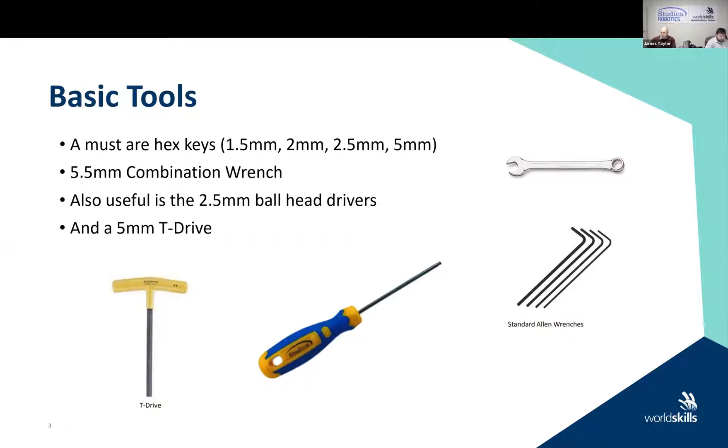There's a 2.5 millimeter ball head driver. So we have a picture of that there. That's kind of handy. And you may want a larger 5 millimeter T drive or maybe some T drives. And when we switch back, we can talk about that. So when I start to put together some frames and so on, I'll show you some of these tools that you would think about having in your collection.

Okay. Some of the other things that you may want, and I'll show you these, is needle nose pliers. These are kind of handy and they're easy. Everybody can get needle nose pliers just to reach into certain locations. If you are going to adjust the wiring on your robot, you may wish to have a power pole crimper and some power poles. Okay, so those tools are easily available. We have them for you. You can get them online or add them to your kit.

You may wish to change some of your cables, so you can do custom PWM crimping. So we keep a PWM crimp tool here just in case we want to make longer or shorter cables. And I may use, I may not use, I've got a little picture of a sample vise there that clamps onto the edge of a table.

As James said earlier, if you're going to an event and you're allowed one toolbox, that can take up space. So that's something that you have to think about, whether you want to bring it to an event. But locally or handy around, you can have those, and there's just a sample one. I use a little one that's got a slide on it that clamps to the side of the table that I'm working on.

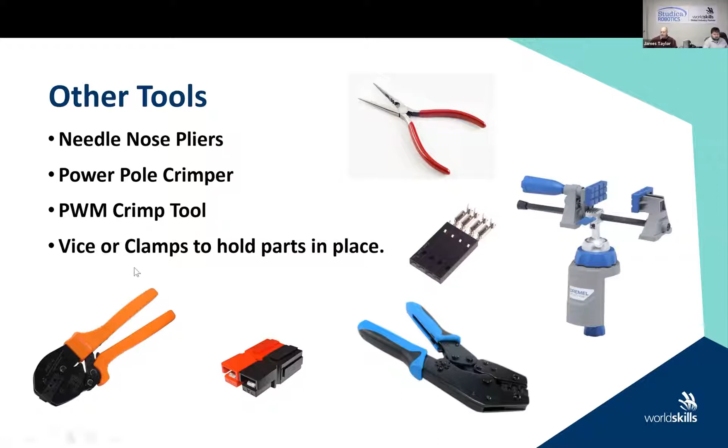Remember that when you do go to an event itself, there are some tools provided, yes, and you'll have a list of those, and there would be vises and so on. But sometimes when you're trying to assemble certain mechanisms and you've only got 2 hands, it's kind of handy to have that extra hand going forward.

All right. So today we're going to look at a chassis. Some people would call it the base. Some people will call that the drive system. And one thing that you must remember about your chassis is that it's generally more important than anything else in the robot. If that base chassis isn't successful, then your robot is not going to drive. So this is where we start. We start with this. We go through the design iterations.

Okay, what type of chassis do we want? What type of weight does the chassis have to support? What drive system are we using? We may have obstacles to go over. We may have height restrictions and drive restrictions. And you also have to think, when you are designing your chassis, exactly what your programming skills are.

So we cannot provide to you all of the resources. So with a lot of these different chassis, there's a little bit of extra math and a little bit of extra theory when you're going to put them together. Your chassis needs, of course, to meet your strategy goals. So when you get a challenge to start with, the first thing you want to do is sit down with that challenge and do a strategic analysis.

I usually tell people when we're doing this to start, look at all the tasks that you need to complete and begin to do two things well, and work towards doing those two things well. Once you do those two things well, then after that, you can begin to redevelop and work onto it. But a lot of times it can be difficult if you try to do too much at once.

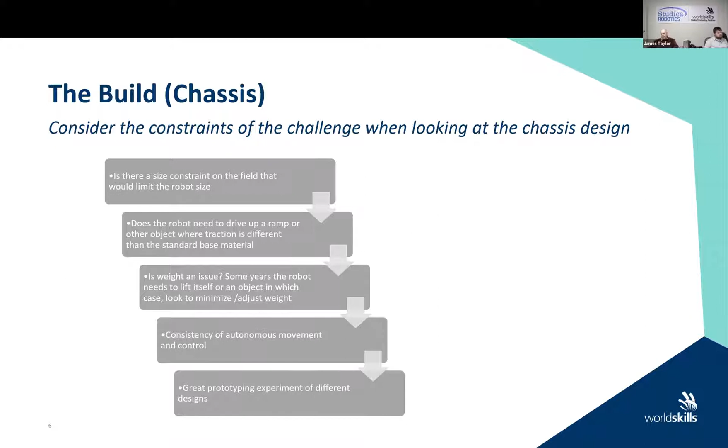And please remember that great prototyping is what you need to do. You should experiment with all sorts of different designs. On the floor behind us right now, there's 3 or 4 different designs. We've built all sorts of different kinds, and we've just prototyped them, and then we sit and we say, okay, these are the performance characteristics of what we built here. It's best suited for this challenge. These are the performance characteristics of XX or YY. And this is what we do going forward through that challenge.

Okay. So the drive base. Our drive base that we are going to build is going to be a Kiwi drive, or a 3-wheel holonomic drive. It'll have 3 omnidirectional wheels and DC motors. So we're going to use 3 DC motors on it to drive the wheels. Why did we choose it? Simply because it is an interesting chassis to build, so that we can take a look at some of the programming algorithms when you are going to do this type of chassis.

For those of you that haven't built one, it is not the easiest chassis to build and program. There are a lot of issues. There's math involved. There's weight distribution involved. There's lack of traction involved when you only have 3 wheels versus 4 wheels, and so on. But we thought we would build this chassis in this training because we've built some other chassis in different trainings.

They're becoming a little bit sought after. We see a lot of personal service robots right now out there that have 3 wheels, so that you can do that. It gives you a little bit of greater maneuverability. But remember, as I said, it comes at the expense of some complex algorithms required to program it. A robot like this, which has 3 motorized wheels, can have fairly independent tangential, normal, and angular velocities.

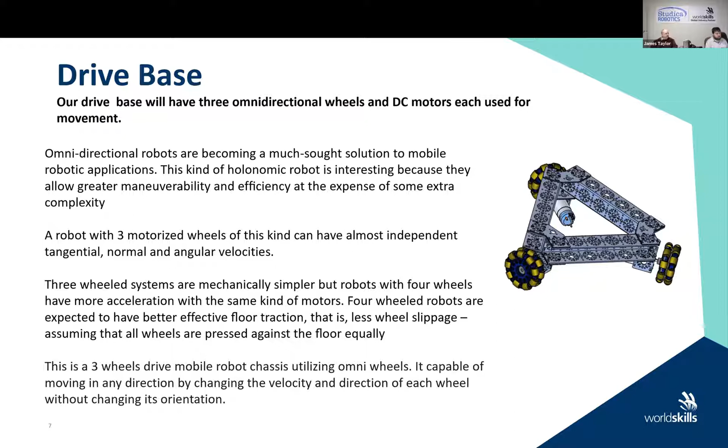So our 3-wheel drive robot chassis we're going to build using our Omni wheels. So it will be capable of moving in any direction by changing the velocity and direction of each wheel without changing the wheel orientation. So how is this possible? James and I looked at this and thought about how much math and theory we would actually put into this so that you can see it. This is what I call the simple explanation.

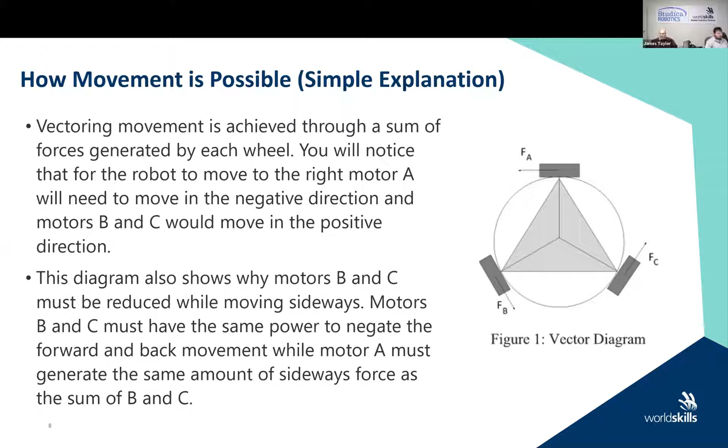So not only is a motor changing direction to move the robot in a different way, you're also adjusting the power on each motor when you're going to try to negate different forces. So that is a very, very simple explanation on a vector diagram of this type of movement. Somebody just asked the question, is this a holonomic or a non-holonomic? Basically this is a holonomic omnidirectional mobile robot.

This is a little bit of an explanation of the theory behind it a little more. So it covers the occupied robot space. There has to be an omnidirectional motion method in geometry that gets figured out, so that the robot can move in any direction, irrespective of its position and orientation. So there are some calculations that are required. We did not want to bore you with all of the different calculations.

I will share the paper that I've got here from the Journal of Robotics and Control. I picked one of the newer ones that I found, and this will talk you through the theory about how to set up a 3-wheel drive holonomic robot, about vectoring and about different motor velocities that are required to move in certain directions. It provides a not bad little chart in there about speeds of each motor at each time.

And there are other resources that are available. And I'm quite sure that if a lot of you are in a robotics program, a lot of this theory is taught to you in the classroom going forward. All right. Okay. So that's there.

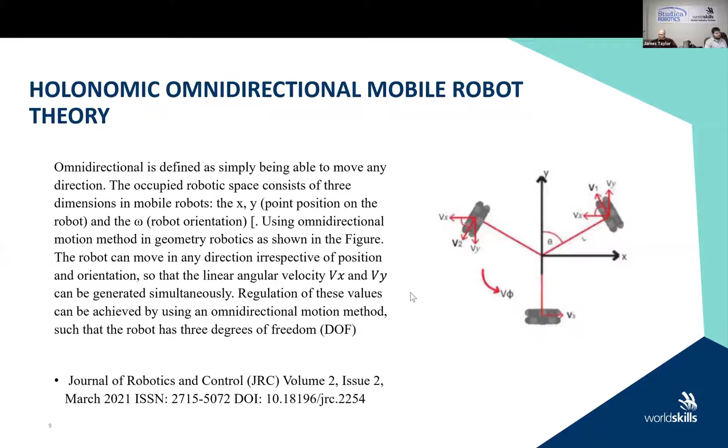All right. So for this build, we are going to need the following. This is the bill of materials for it. Like I said, we'll send you out the interactive CAD file. We'll email that out to everybody on our break, and it will have the bill of materials in it. It's very simple. We're going to use 3 288 millimeter U channel, 6 120-degree brackets, 3 48 millimeter U channel, 3 motor mount plates, 3 Maverick DC gear motors. We're going to use our 3 Omni wheels.

And there will be a total of the following nuts and bolts required. There will be M3 by 12 millimeter socket-headed cap screws. You'll need 51 of them. M3 nylock nuts, 51. We're going to talk about the nylock nuts in a minute. We put nylock in here because we designed this as if you were going to do your final build. If you're just participating in this and you are going to disassemble this and take it apart again, you'll probably want to use 51 KEP nuts. But like I said, this was our final design, and I'll talk more about it in a second.

And you're going to need 30 M3 by 10 millimeter button-headed cap screws. Now, do not get in the chat when I change the slide and go, oh, I need that, because you don't. We're going to send you that interactive PDF file when you get into your building. All of this list will be there for you to get ready and to put together, and it's easily referenced by the part numbers that are required. So this is what we are going to build our base chassis from.

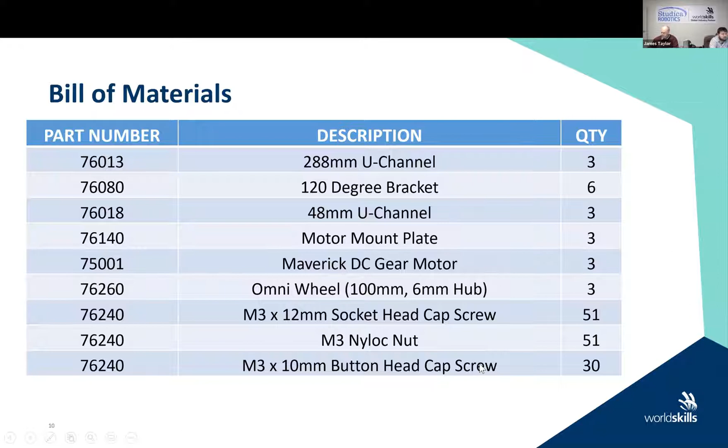So I will talk about the mechanical hardware for you to get started. This is the explanation about the nylock nuts and the KEP nuts. The nylock nuts basically have a nylon insert on them. What that does is it allows the nut to grip a little bit better and it holds it. They're a little bit harder to thread on and a little bit harder to unthread. And after 3 or 4 uses, the nylon insert on the inside basically wears out and you lose the effectiveness of the nylock nut.

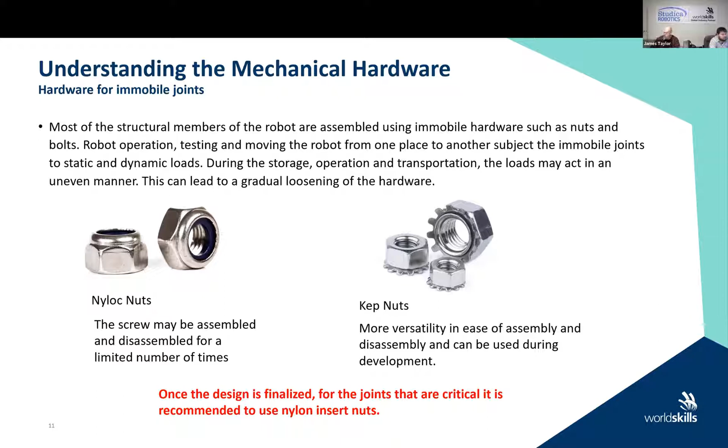So if you are going to do assembly and disassembly a lot during your development phase, you should use those KEP nuts. Use the KEP nuts for now, and then once the design is finalized, for critical joints that do not need to move, you can use the nylon insert nuts. So just a little bit of a blurb on assembling your mechanical hardware for different mechanical joints.

Okay, so we needed to look at our base design for our triangle base. We had a few design considerations with it. This is good for a flat surface. It's very, very good to navigate in a tight space. And for a tight space, here I put down a domestic environment. We don't take a lot of space, easy to spin around, easy to move through a door, easy to move through an opening. Narrow hallways, for instance, if it was a real industrial robot, would work well.

Due to their high center of gravity, because generally any mechanism that you design goes straight up the center of the robot, they have stability problems when they're moving on a ramp. As they begin to move on a ramp, they can tip left or right. Each wheel in this design needs to be 120 degrees apart, and the wheels need to be perfectly perpendicular to the center axis. If they are not, you're going to run into problems.

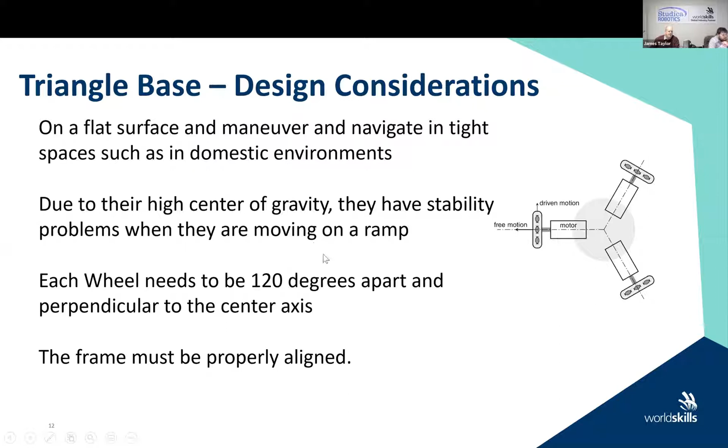Your frame must also be properly aligned. We'll talk a little bit about this when I take you through some of the steps to put your frame together. But it does need to be aligned correctly, and your wheels do need to be perpendicular. Otherwise, your vectoring math is not going to work, and your robot is going to drift and not properly move in different directions. So as I said, it is not the simplest or easiest robot to build.

We're going to build the frame in a couple of sections. The first thing we're going to do is build and align the basic frame. When we build and align the basic frame, what's important for you to look at here is that we're going to use the 288 millimeter channel. We are going to use the 120 degree brackets.

And what's very important for you to realize is that the way that this was designed for the motor mounting is that on the top side, we are using 4 of the M3 by 12 socket-headed cap screws and nuts right here. But on the bottom side, you'll notice that we're only using 3, okay? And the reason is that we are going to mount the 48 millimeter U channel here with the motor mounts, in order to put this frame together.

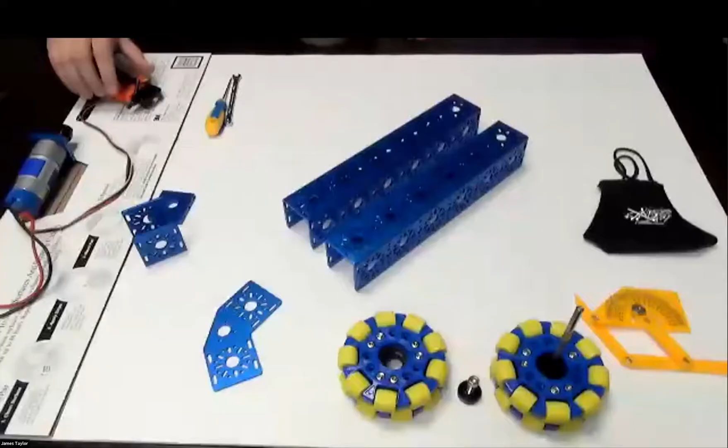So if we had that extra socket-headed cap screw in here right now, what it would do is it would get in the way of us when we wanted to do that next stage for the mounting, all right? So I'm just going to stop sharing my screen, and we're going to switch over the cameras. All right. So I'm going to move that vise.

So basically, we're going to start with the 288 channel when you're going to build your frame when you get your time, all right? So the channel, the mount, the flats, the motor mounts and everything in the collection, they have a hole pattern with it that's easy to align and put together. So we can start by putting our frame together, and you'll notice that we do have our 120 degree mount that we are going to use with that frame. We are going to put a mount on the top, and you're going to put a mount on the bottom of your frame as you go forward.

Remember that what I said was there's going to be 4 of the 12 millimeter socket-headed cap screws right here that you'll use on the top. So when you're going to put a frame on a mount, this way. Oh, hang on. There we go. When you're going to put a frame on the top of the mount, you're going to use 4 screws in the top, so that you can see that and put that in.

And then you're going to want to make sure that everything is properly aligned. We talked before about the fact that when you put a frame together, do not tighten everything up completely. You're going to put your socket-headed cap screws in. You're going to have some movement here, because then you are going to have to make sure that this is properly aligned so that when you put the motor mounts on, they are perpendicular to the center. There's a lot of different ways that you can do this as well.

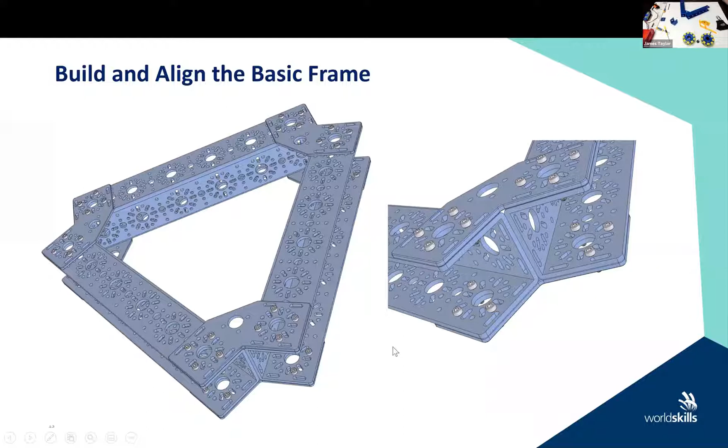So you're going to align the basic frame. Once you build and align the basic frame, you're going to add the 48 millimeter to it. Okay, so these are zoomed-in diagrams from the 3D PDF file that you've got. So this is the way that we decided to build it for ease. We then add the 48 millimeter U channel to the frame. And once again, we have to align that.

Remember that when you put the socket-headed cap screws in, there is going to be play, right? So you need to make sure that these properly get aligned so that they're all perpendicular. Otherwise, the wheels will be out of alignment. They won't be properly 120 degrees apart from the center line of the motor. So the next step in your build is to add the 48 millimeter U channel. That once again is done with the M3 by 12 millimeter socket-headed cap screws.

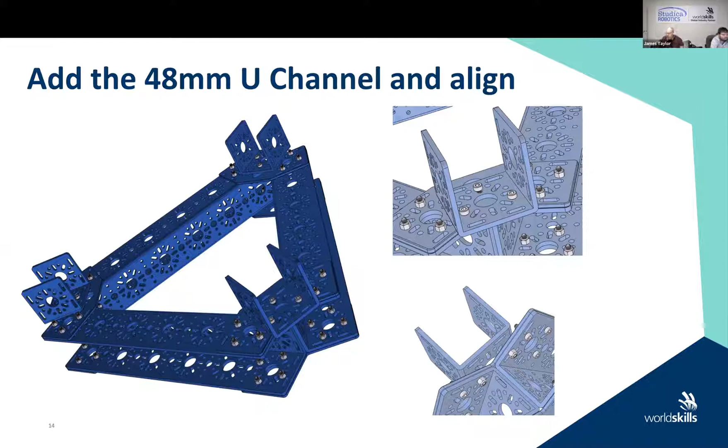Okay. Once you've done that, what you want to do, and I don't have all of them in this one, is we're going to mount the motors to the motor mount plates. So you'll mount your motors to your motor mount plates, and you'll use your M3 by 10 millimeter button-headed screws. And I'll show you one in a minute that doesn't have all the screws in it, and one of the reasons why we put them all in, but you're going to just mount your motors to your motor mount plate.

And then once you have your motors in your motor mount plate, slide them into the 48 millimeter U channel, and you'll then use the button-headed cap screws to affix that motor into that 48 millimeter U channel. All right.

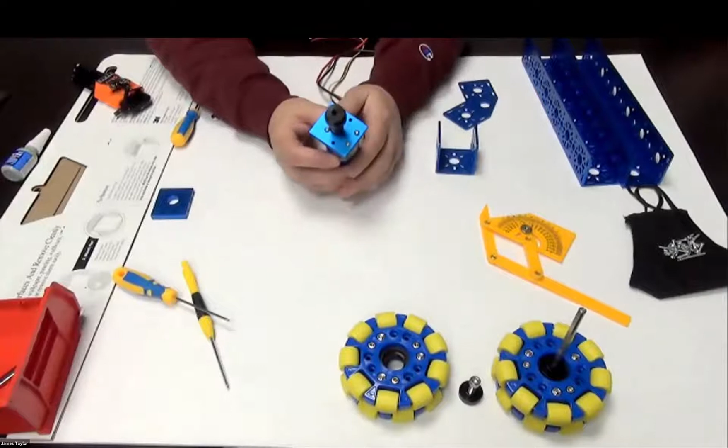So if we take a look at this motor, there's the Maverick DC motor. This one I still have a hub on it for the wheels. But your button-headed cap screws are going to go through. You can see with this one I only have 4 in it right now, and I can actually move it. I want to make sure I use the maximum allowable so that when I tighten those up, if one comes loose, I won't get any extra movement. So I'm going to use 1, 2, 3, 4, 5, 6. We're going to use 6 on there going forward.

Once those motors are mounted, then what we do in the build instruction is this is already on your robot frame. You're going to slide the motor in, and you'll affix this into the robot frame using 4 button-headed cap screws on the side. So you've got the CAD drawing. Everything is all there and ready to go. Excellent.

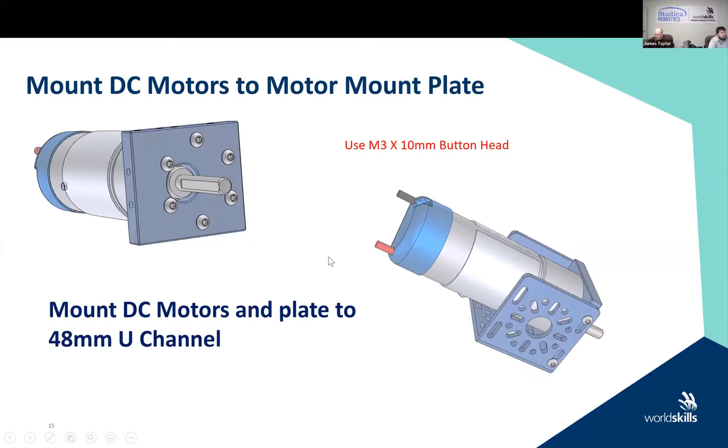So at the end of that, it's a fairly simple structure. This is what you're going to have. You'll have your triangle base. You'll have your motors mounted with no wheels on them so that you can see it. And you want to, at this point, do another double check to make sure that everything is square and properly aligned. The center line of those motors have to be aligned at 120 degrees. And the center line of the motors also have to be perpendicular to the square face of the motor. If not, your wheels are going to be crooked and out of alignment.

So it is very, very tricky to get this oriented correctly. If you find you get a little bit of movement when you drive the robot and it's not quite right, you might want to recheck that alignment. You can make a jig, you can make a tool to help you with it. I just use a small compass protractor that I've got. I thought about making a laser for this, but I thought that was a little bit of overkill. So you'll mount the motors on the frame.

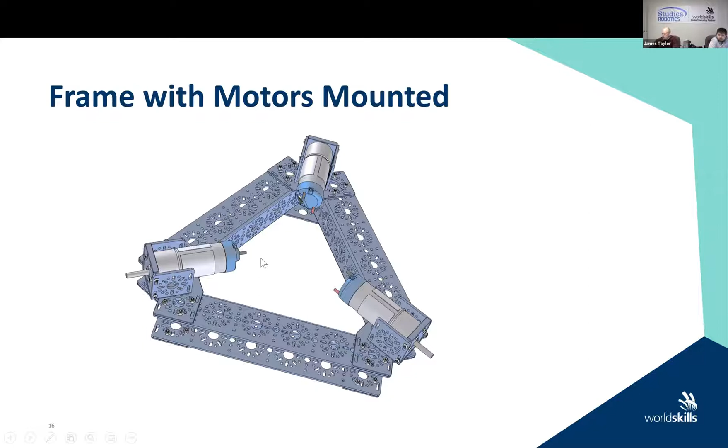After that, you want to mount the Omni wheels. And I'll talk a little bit about mounting the Omni wheels and the hubs, just so that you can see it. What you've got on an Omni wheel is a deep side, as we call it, and what I call a non-deep side or a flat side. And what you want to make sure with your Omni wheel, and I'll show you in a second, is that you are assembling it correctly and using the right side so that you get less slippage.

So you can put those together. This is the way that they work. You can use a couple of different things with it, and I'll just swap the screen back over here. All right. So we use a universal hub mount on there. So the hub itself will have 2 set screws for the shaft on the motor. So there'll be 2 set screws in here.

You'll see that. One goes against the flat on the 6mm shaft, and the other would go simply against the other motor shaft to provide some extra ability to lock that, all right? The wheel itself will then go onto the motor, right? When you're gonna work through it, you're gonna see it.

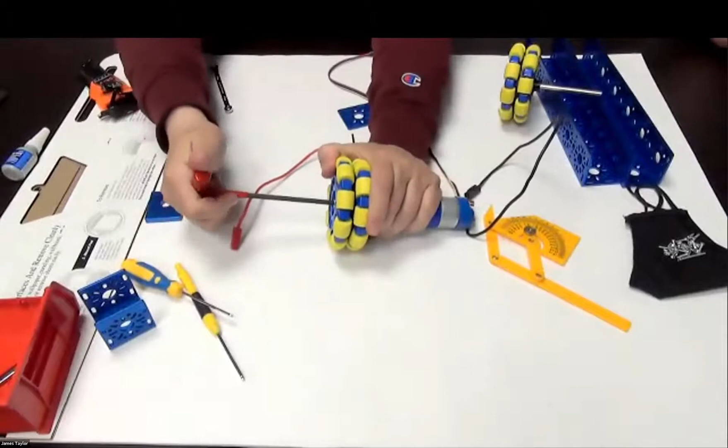Now, a couple of tricks on this. As you begin to tighten this up, you got to be a bit of a bull because it is a pressure fit. As you tighten it, the wheel can move on the motor, so it's not really tight. So you need to make sure that you can properly hold that wheel, and it's the same thing if we were using mecanum wheels. And I'll use a 5mm key here, right? And I want to make sure that I'm properly holding that wheel so that I can tighten that. There's really no need to over tighten it.

What we find is that people try to do it this way where they're not holding the wheel, and the wheel starts to spin because it's not under power, right? As they're putting that together, they don't get enough of a friction fit on that hub, so it can come apart. So you want to make sure to use somebody else if you're holding that wheel, right? I can hold mine at an angle and I could tighten that and it's pretty straight.

We use on ours, and I put it on the PowerPoint presentation, blue Loctite, all right? So this is blue Loctite. There's different colors of Loctite. There's the actual name brand Loctite. This one's called Vibratite, which is a Loctite clone. There's red, green, blue, purple. Each one is for a different use, right?

But the blue Loctite is what we call medium Loctite, and it is designed so that you can loosen off a screw and take it back out. So it has what we call medium thread lock. So it will keep things like your set screws in firm. It'll reduce the slippage on a screw like this, but blue Loctite also will enable me, if I need to change that wheel, to simply break the Loctite. If you use red Loctite, it's going to seize it right in there, and you're going to have all sorts of difficulty. So that's the way that we are going to do that.

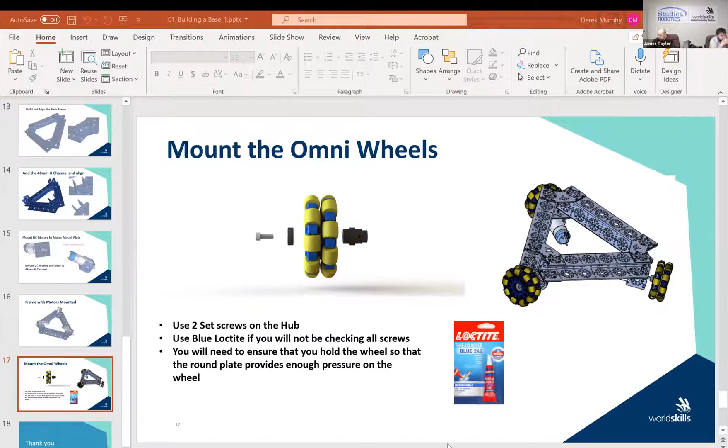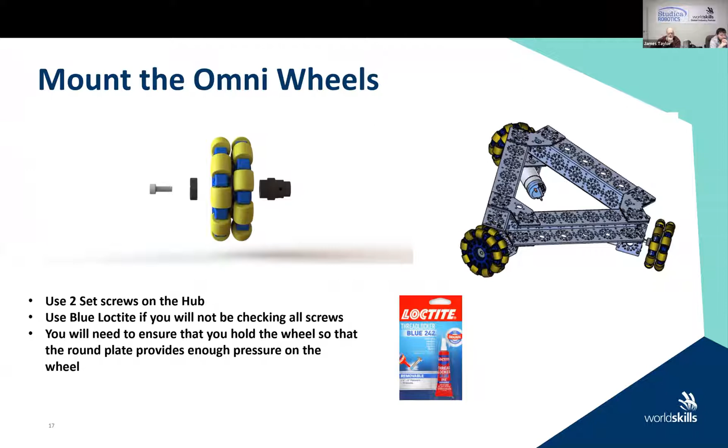All right. So just a bit, then what you're going to do on your chassis is you're going to mount those, okay? As I said, you're going to need to ensure you hold the wheel so that the round plate provides enough pressure on the wheel to do that. And I would suggest, and you don't need it now, but going forward, think about it. Find yourself some blue Loctite or some blue medium thread locker, okay?

So that covers the basic design or build of the frame that we wanted to do today. We're going to start simple. We just have a question, where can I find the PDF instruction? Like I said, we're going to have a break. And if you filled in the Google Doc, we are going to email that out to you, okay, so that you have that PDF instruction going forward. The PDF instruction would also have the parts list so that you can take your time now to get that ready. And we want you to build that frame in this session. So we'll send that out, and we will be available to you back and forth to talk and answer questions on the frame.

So why don't we take 10? Oh, James will show it. Okay, perfect. So let me stop the share. I gotta check my Google Drive to see how many people.

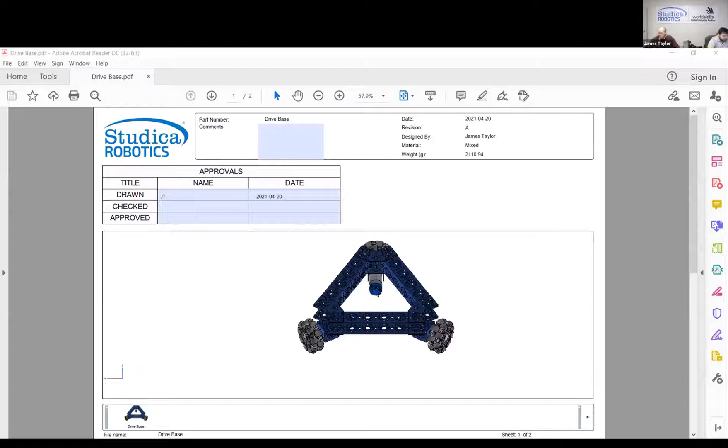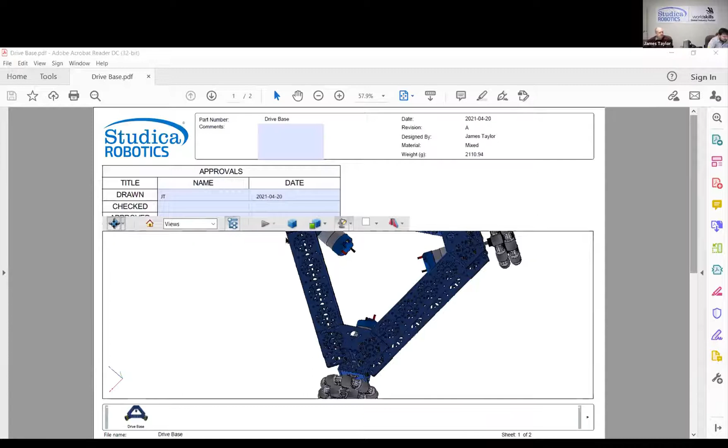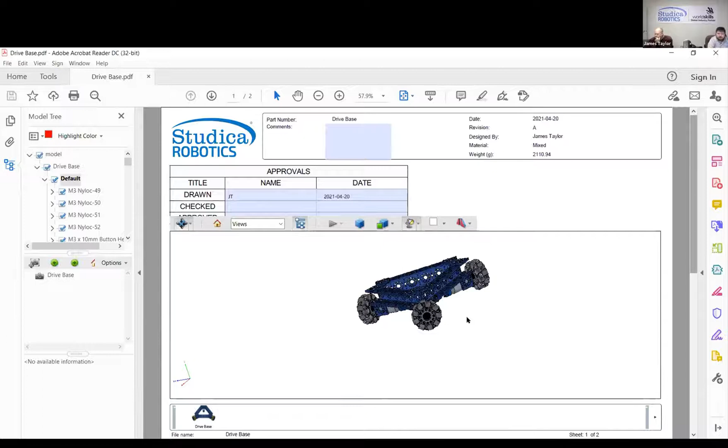So here we have the 3D PDF. Oh, perfect. So you can view the actual parts here. And then at the bottom is the parts list, even though you should be able to see it from the drawing. What's nice with the PDF is you can go into the tree and then take parts apart and choose what you want and what you don't want in the drawing. So if I uncheck everything, I can start checking stuff to see what is required and how to assemble and build it. You can zoom out, you can zoom in, and it allows you to build the robot without needing CAD software to open a step file or anything to see how it's assembled.

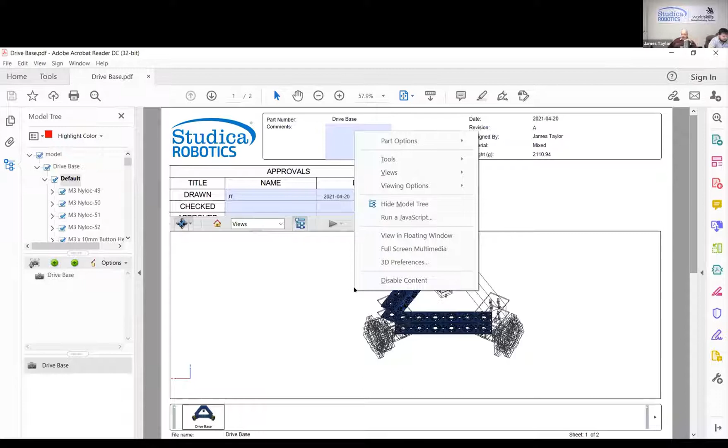Right. So you're going to have the toolbar across the top, right? If you go down in, you'll see that it pops up as you move the cursor over it. If you do go into the section where the CAD file is, if you right click right there, you will get a pop down option. So with that pop down option, if you lose your model tree or whatever, just take your cursor and right click in there and you'll be able to look at that. You could also, if you wanted to, go to full screen multimedia right now, which will allow you to go to full screen, right?

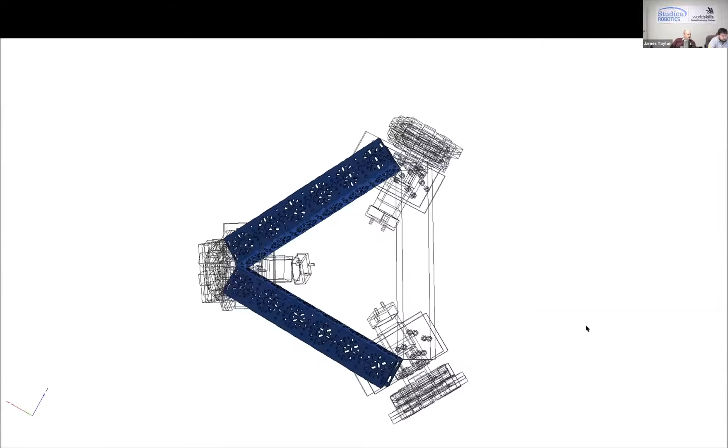Are you actually sharing that? I don't think we see the share. Oh, yeah, we do. Okay.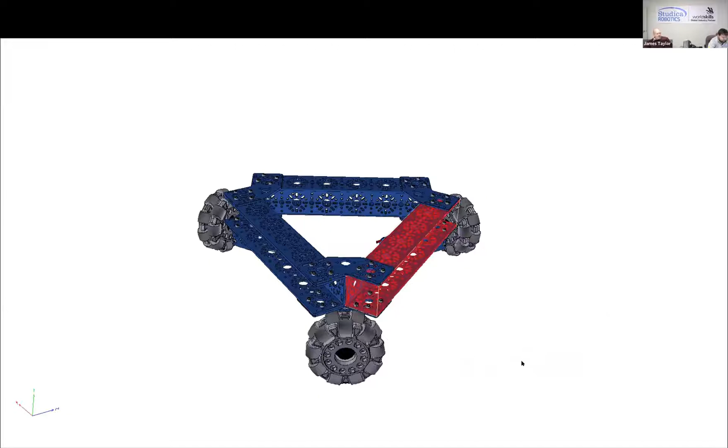So if you can go to the full screen and you can rotate that around. If you click on an object, for instance, it'll highlight that object. And if you right click right now anywhere, James, with this, you could go back out and end that and also look at that 3D modeling tree as well. So you can isolate parts, view parts, and have a look at that tree. And that modeling tree, when you have that up, will give you exactly what part is what and how it goes together. So you'll be able to zoom in. It's interactive, and have a look at it as you go forward.

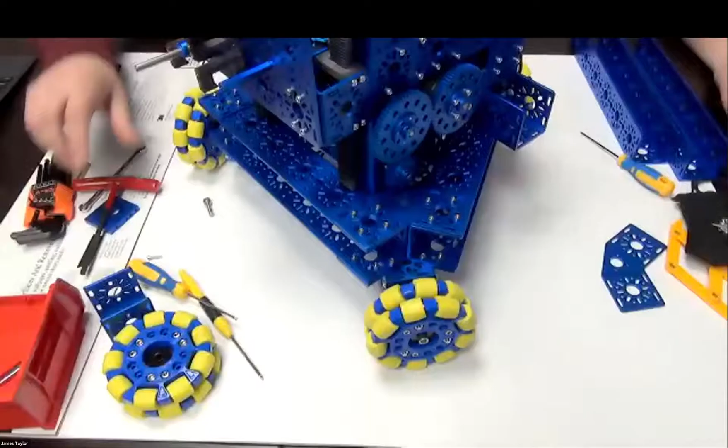We're live. Okay. So a couple of points for housekeeping because we had a few questions in the chat. I had emailed the interactive PDF. I'm just going to go over that with you. I then emailed that theory document on the holonomic drive. Some interesting reading on that and the way that you do it.

When we get to coding next week, I think James, because he's smarter than everybody else, we call him smarter than the average bear around here, he did it a little bit of a different way, using a different theory. Okay, so there's a lot of things that you can do.

And I also emailed you, in case you wanted it, the bill of materials for this section of the build in Microsoft Excel as well. I'm just going to share my screen and open up the interactive PDF. Okay. So I've just got everything that I used as a reference for today inside one folder as an example. And I'm going to just double click on the drive base.

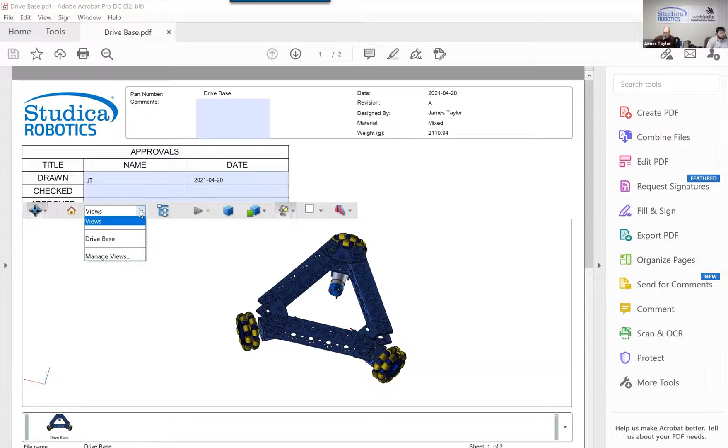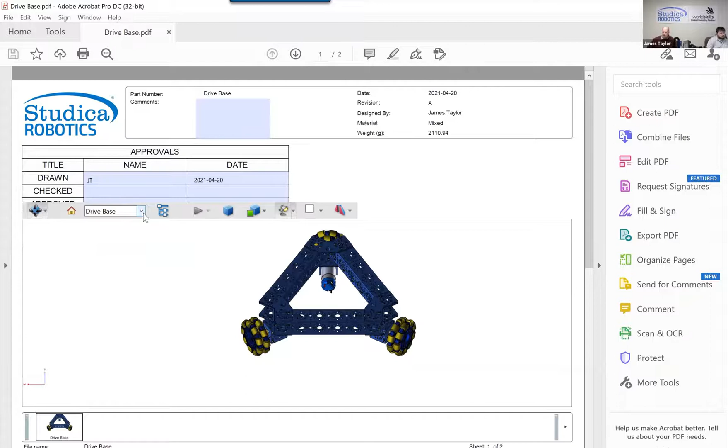You may or may not have some views in here, okay? So that view is the base view for drive base. If I sent you the one I play with, I actually went in as I was building this and I turned objects on and off and I created multiple views for myself. So I have a view called 48 millimeter only. I have a view called base only and so on, all right?

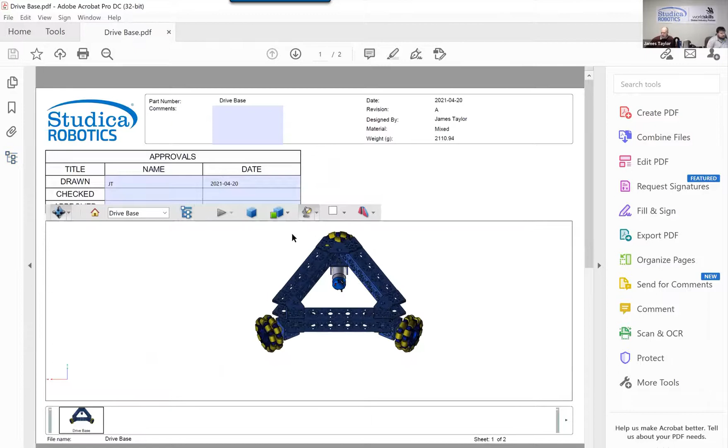You click on that hierarchical tree and open that up from your default view and you'll see all the component parts that are there so that you can scroll back and scroll up. And when you want to mess around with this, you can create your own views by turning objects on and off as you go through. If you hide the tree, you can do that. And there's other options here to change the view or the illustration and so on. If you want to cross-section it, you can.

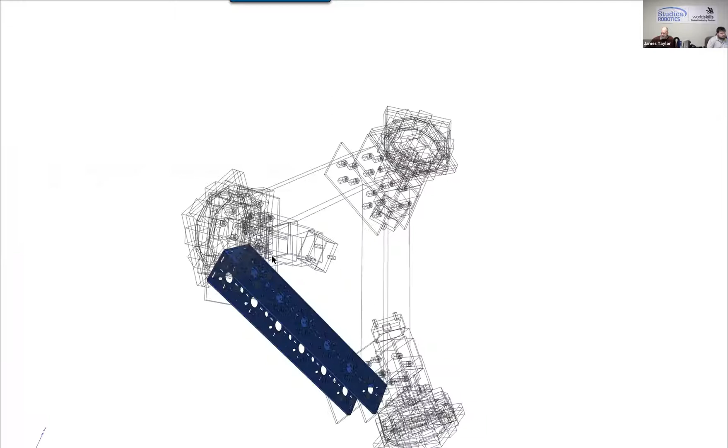What I do a lot of times is I just go into the full screen multimedia mode. And then I can just interactively rotate that view, have a look at the way that something is put together, rotate that and view that out a little bit as we look at it. Okay. So you can work through that in that interactive PDF. So there, just wanted to go over that.

If you have any problems, just chat that. I know a couple of people had some issues opening things up. All right, you want to show this robot?

Okay, so I'm going to try to move this closer. I'm so quick that during the break, I built this.

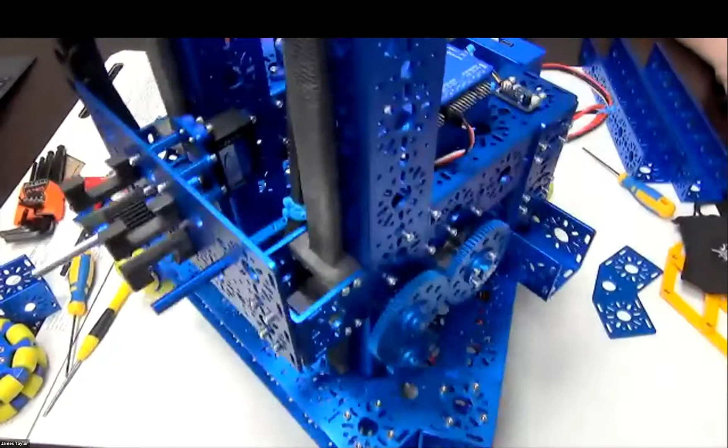All right, pretty quick. So overall, this is what we are going to end up building. We thought we'd start slow today, and we are going to build it in subsystems. So the drive base that you're putting together, you'll see is here. We're going to leave that open right there so that you can see the way that the 122 brackets are put together. You'll see that the 4 screws are on the top, and there are the 1, 2, 3 on the bottom, and then you have that 48 mount underneath for that base frame structure, and it's squared up, okay?

We will then build the A-frame and the tower mechanism that we see on this a little bit later in the week as we get going. So we'll probably send these to you ahead of time, and we'll talk about the different mechanisms and so on. In preparation for Thursday, now that I have it, I'll email out everybody the bill of materials so that you can at least get the parts together as we go forward. And then we'll begin to talk about the orientation of this robot and why certain things are in a certain direction, including why we mounted the Titan the way that we did.

So we have our Titan mounted at the back, and why we mounted the VMX the way that it is. Little trick, we talked about center of gravity. Remember that it's got the IMU in it. So you'll notice how it's mounted in the center of the robot, with the Studica logo at the front of the robot. So this is the front of the robot, and that's so that we get the correct default orientation for the IMU. It's also very easy for me to get at right now. If I need to change a cable or adjust a cable, very simple.

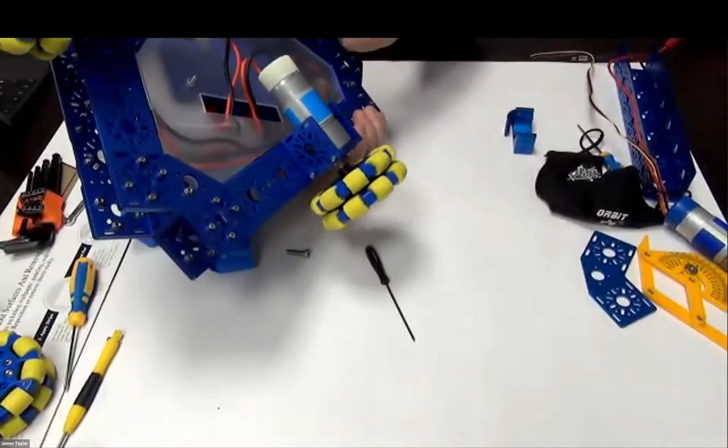The question was, well, why don't you mount them that way? Why are you mounting them the way that we did before? And, you know, it can be a fairly simple answer. It was design preference, perhaps, okay? But one of the things that we get when we do it this way is we get a little bit of a different alignment where we can put other components in for it.

And one of the big things about it is that if you look at your distances that you're going to use, we're at the same height between the robots, but we're actually widening out the base, okay? So when we mount it this way, you know, we have certain distances between it. We're narrowing the base. If the robot's gonna have a high elevator system on it, we want to even out that weight a little bit.

So by mounting the wheels here in the corners this time, we actually get a little bit of a wider base, okay? Which will overall lower the center of gravity and improve the stability of the robot, all right? So that's one of the reasons that we did it that way. Coding is no different. It's entirely up to you. There's lots of ways that you can do that when you're gonna put everything together, okay? So here we had them in the center on a sample base like this, right, when we drove it.

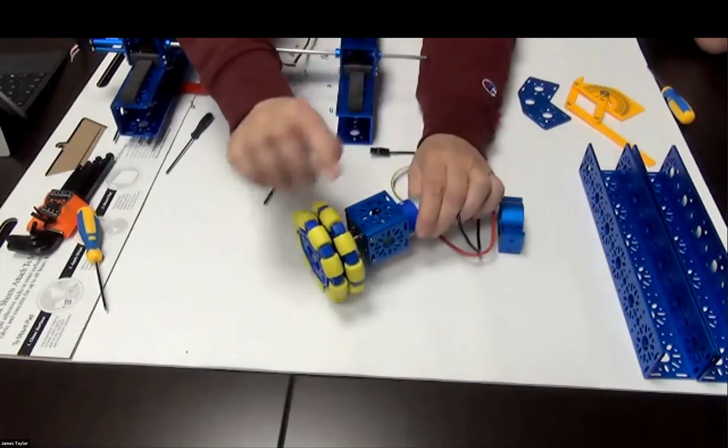All right. I'd left this up here with a close-up so that you could see that the front motor mount goes into the 48 millimeter channel. Notice that the flat piece is on the top here, which doesn't have the 2 screws because they do not line up. They're used for something else that we're looking at designing for other mechanisms. So when you put those in, you have your 4 button head screws, and your flat piece will be at the top of the opening. You can slide that in, and then mount the wheel for your drive.

Please remember what I said about the wheel. You're going to have to make sure they're tight and don't slip. As your robot works, the wheels are going to wear. A lot depends on the surface they're on. So you always want to check and tighten these anyway. I would create yourself a maintenance checklist at the end of each robot run or every hour, things you want to check, and go through that. Because if you're like me, I'm aging and I forget a lot of things easily. So I have a lot of lists. All right, which is good.

So we'll be here if there's any more questions on that build. You have the files for Thursday. We're going to talk about the different mechanisms on Thursday. Thursday is going to be a busy day because it's going to take us a while to look at a mechanism like that and build it.